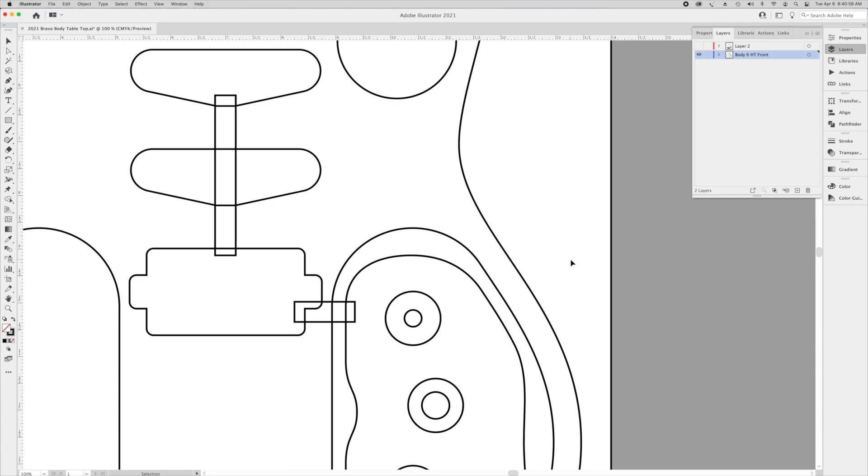But what you see here is the body for the guitar that I'm going to build. And this was done in Adobe Illustrator. Now, you can use really any sort of two-dimensional CAD program or vector-based drawing program. I use Illustrator because I happen to have a subscription to the Adobe Creative Suite, and I've been using Illustrator for so long that I can work really fast in the program. So a drawing like you see here can literally take me 10, 15 minutes to draw, and then I can move on to creating my tool paths.

But you can see here it's a single cutaway shape. This is my Bravo guitar body design. And this particular build is going to feature a humbucker single coil configuration.

And that's what these drawings here indicate. These are the pockets for the pickups, and then these are the pockets for the wire routing. And then over here, down in the lower right corner, this is the control cavity. So there will be a tone pot, a 3-way or 5-way switch, I haven't really decided yet, and another pot for volume. And then I have a shelf, this is a recessed shelf area for the cover.

Then these other shapes that you see here are cutouts for weight relief. These are going to be chambers that will be routed into the body to help relieve the weight, because this guitar, since it's going to be made out of a slab of oak, could be really, really heavy. So I want to relieve some of the weight.

Now, I know some of you will ask, well, how does that affect tone? And my answer to that would be, well, I'm sure it does. I just don't know how it's going to affect tone. There's really no way that you can measure that and determine by the shape or the size of the chambers how it's going to affect tone. But since tone is subjective, it really doesn't matter. I just want to make sure that I can remove enough wood to get the weight of the body down to something a little bit more manageable, something probably in the neighborhood of around 3 to 3.5 pounds. So that's what you see here with these shapes.

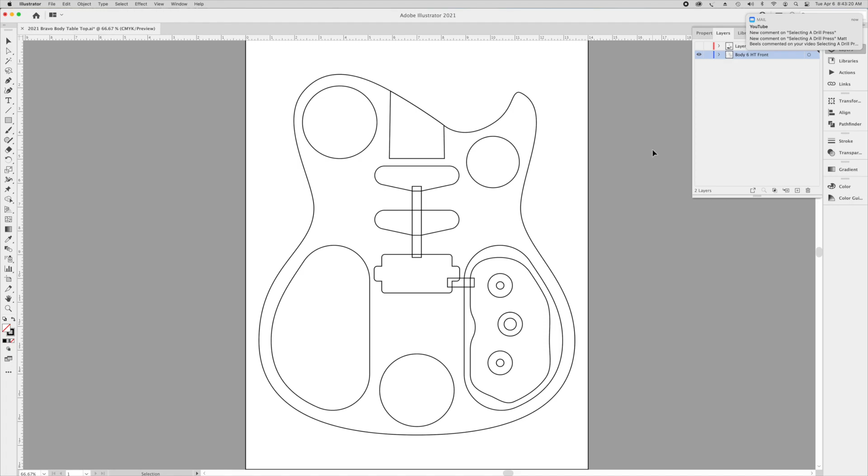Now, another thing I wanted to do when I build this guitar, I decided it'd be kind of cool to do some sort of an inlay design on the body, just to kind of make it look a little more interesting. So what I've done is I've created some artwork here, and this is on another layer. This is a dragon that I have come up with. It's basically a 4-tailed dragon.

And the way I did this was I did a Google image search for black and white vector dragons, and there were a ton of them out there. I mean, thousands of them, literally. And I searched for actually several hours before I found a couple of dragons that I thought would look really cool on this guitar. Now, of course, the problem is you never find artwork that's going to fit just right. So really what you find on the internet is more of a reference point.

So I took a couple of the dragons and created this design in vector in Illustrator, and I manipulated it so that these tails would wrap around the controls, and the flames coming out of its mouth would be right up against, or in the direction of, where the bridge is going to sit.

When I carve this on the CNC machine, this will all be cut down into the body, probably about a 16th of an inch. Then I'll fill it with a mixture of epoxy and strontium aluminate glow-in-the-dark powder. The main body of the dragon will probably be a kind of aqua blue color, and the flames would be a yellow orange or red orange color. So that's what I'm going to do with the body.

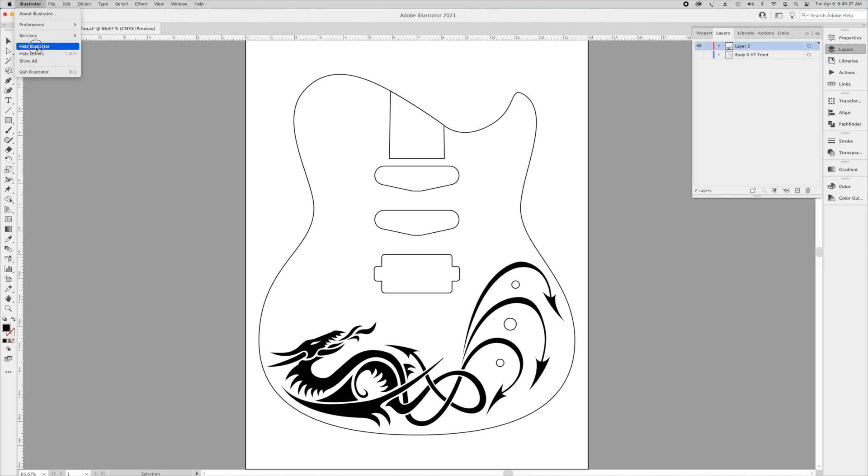What I'll do is jump over to this, which is Easel. This is an online CNC solution developed by Inventables, and I've been using it ever since I used the X-Carve. I find that this program is incredibly easy to use for generating your designs, creating the tool paths, and then actually sending the files to the CNC machine to cut the parts out. Even though I don't use my X-Carve anymore, this program still works with the Arduino Grbl controller that I have on my current CNC machine.

Now what you see here is the very first file that I have to carve on the CNC machine, and this is my 12th fret inlay on the fretboard. It also has at the top the slot for a nut. If you look at the bottom of this page, you'll see all these different pages, which are all the different carving operations that I'll do for this entire guitar: the fretboard, the neck, and the body. So this first one, as I said before, is the 12th fret inlay.

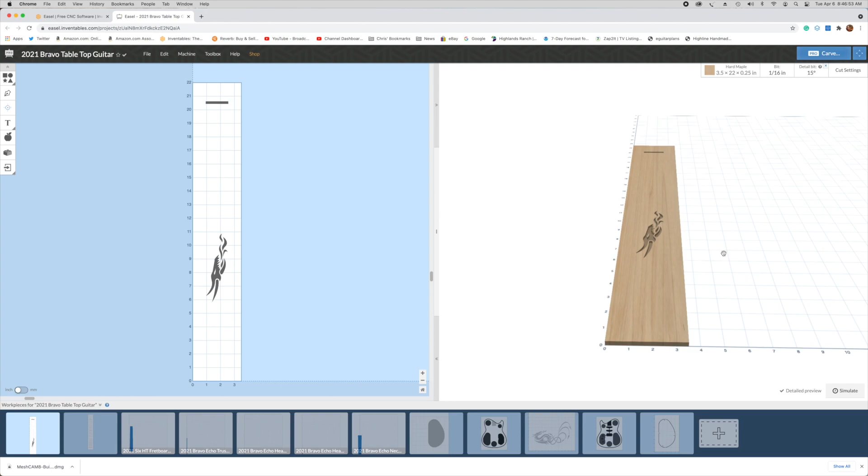You can see here on the right side of the screen a preview of what that will look like when it's carved into the fretboard. Again, I'll be filling this with the epoxy resin mixed with glow powder.

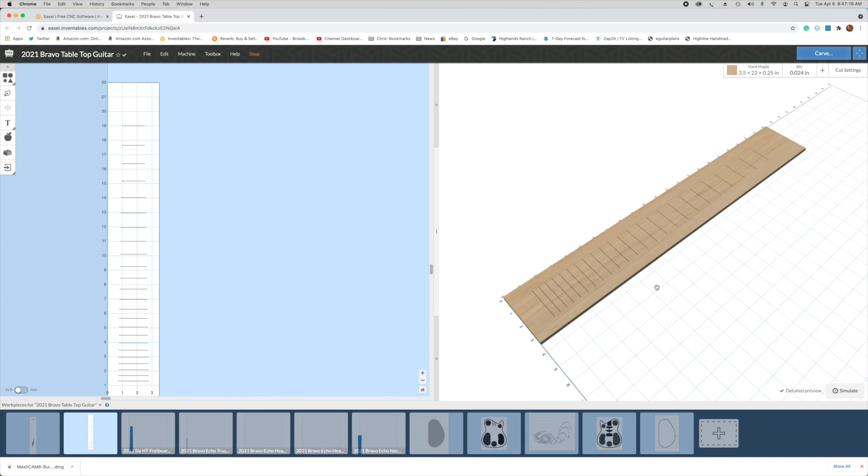Then the next file is the slots for the frets, and I cut this using a very small bit on my CNC machine. I think it's 0.024 inches in diameter, a 2-flute spiral upcut bit. To cut something like this with the CNC machine takes about 45 minutes, which isn't bad when you consider how long it takes to cut it by hand.

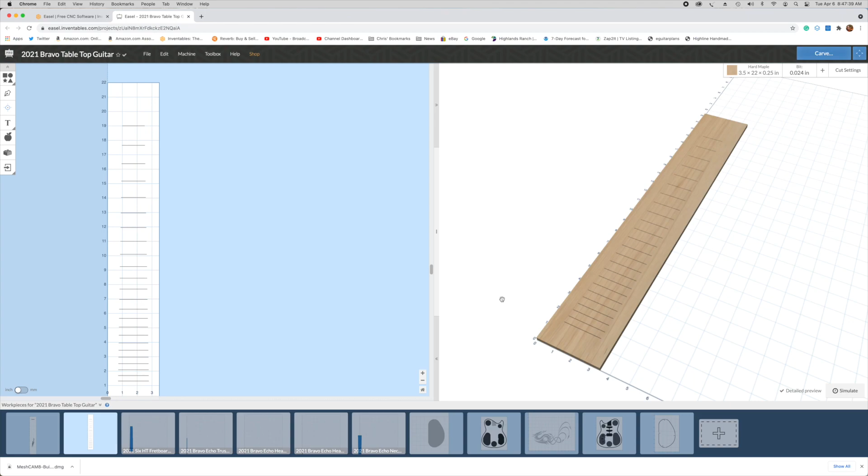Really, the only faster way to do it is to use a table saw with a blade that has a kerf equal to what you need the fret slot to be. The advantage of using a CNC machine is I can stop the slot short of the edge of the fretboard, which gives me a blind fret slot.

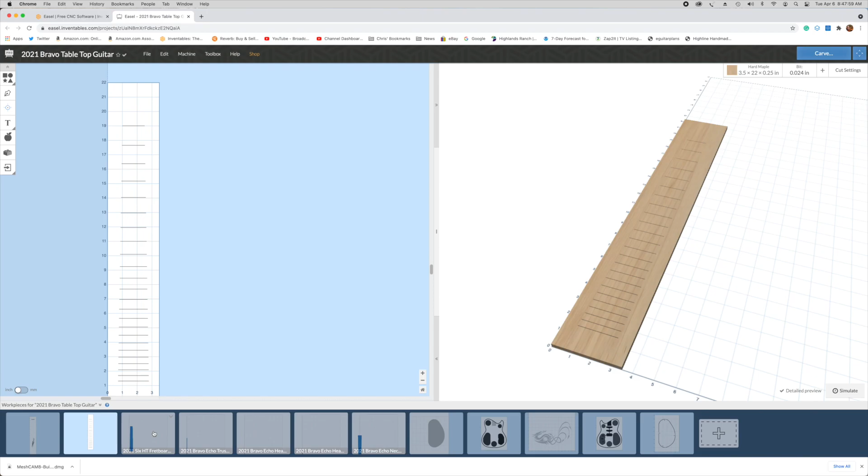Now the next file I have to cut is the perimeter shape and the radius of the fretboard. Now this was actually generated in another program. I created a 3D model in Rhinoceros 3D.

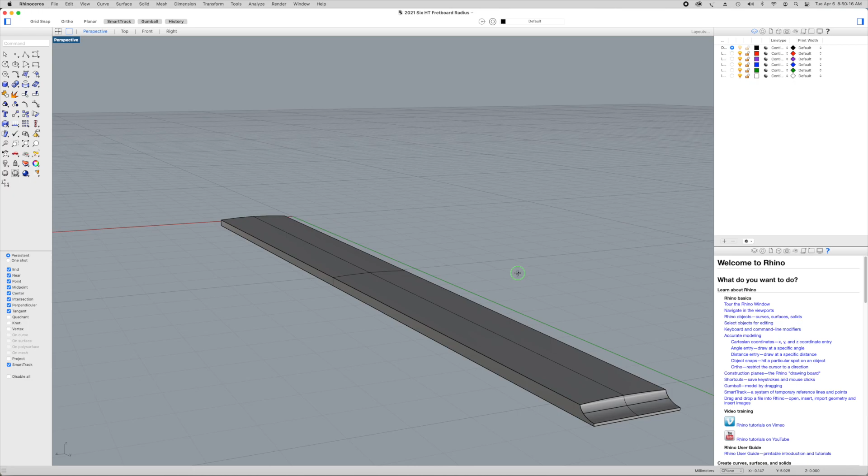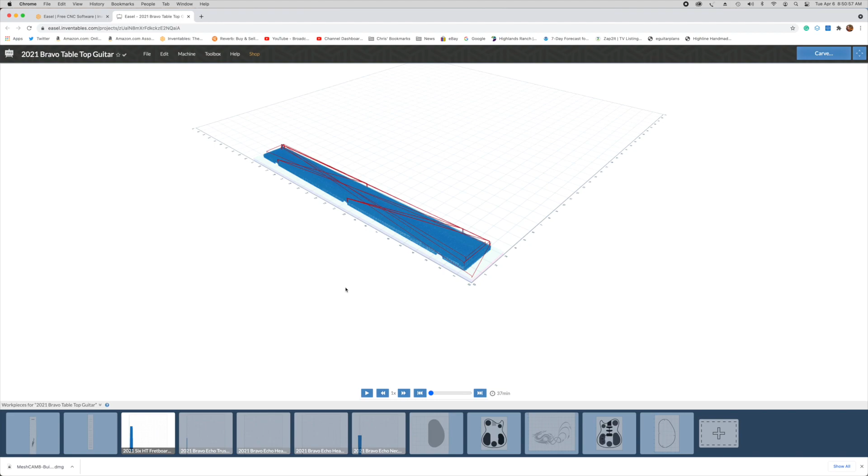Okay, so what you see here is the 3D model that I created for the fretboard. This includes the perimeter shape as well as the radius. I'll use this to create the G-code file, which I then import into Easel. So in Easel, not only can I import my Illustrator layouts to establish toolpaths, but I can take existing G-code formed or written in other programs and bring it in here, keep everything nice and organized, and Easel will serve as my G-code sender to my CNC machine.

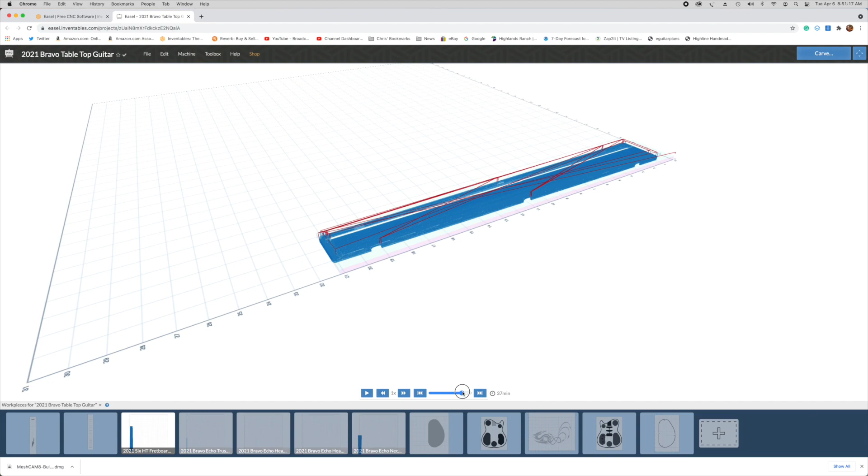So here you can see this is the radius that's going to be sent to my controller, or my CNC machine. All these blue lines are the simulation of how the tool will move across as it forms that radius, and the red lines are rapid moves when the bit has to move from one part of the blank to another.

And then the next carving operation here is for the truss rod slot that will be carved into the neck. It's basically the same thing: a G-code file that will carve out the slot that the truss rod will fit into.

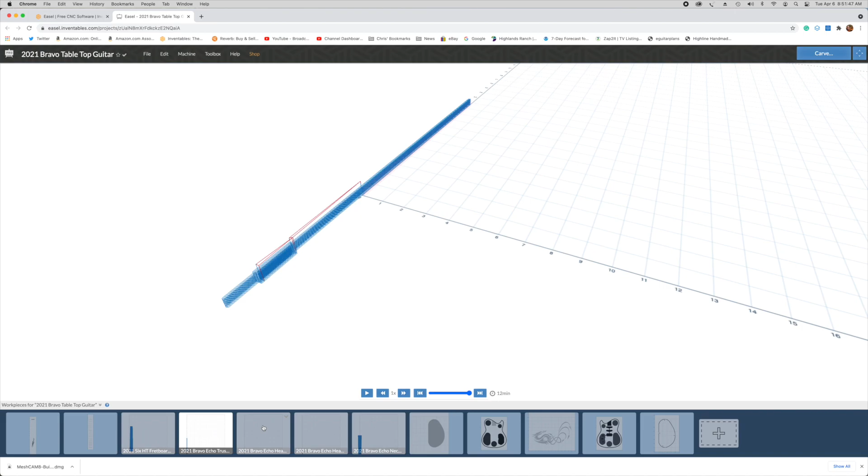Then next is the headstock, the front of the headstock, and it's an angled headstock, so it will carve all the way down into the angle.

And all of my carves are usually, well, not all of them, but carves like this one involve two operations: a rough cutting operation, which will hog out most of the wood quickly and efficiently but leave a rough surface. Then I'll come back and do the finish pass, which cleans up the surface and makes it nice and smooth.

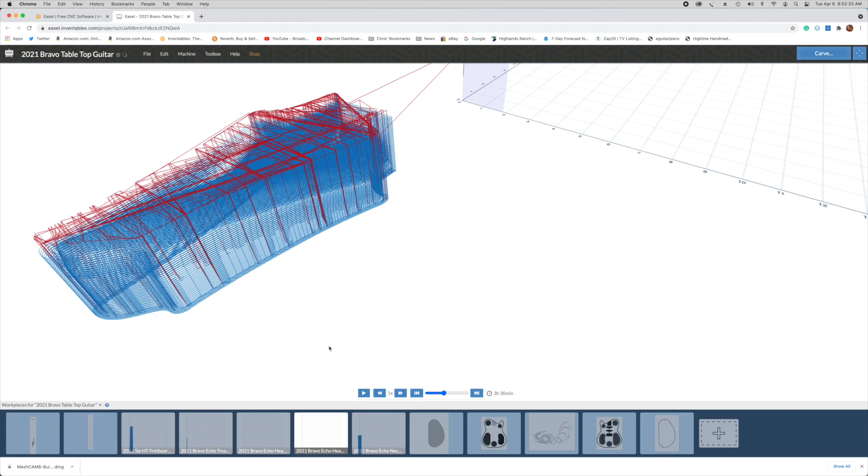So once I finish the front of the headstock, the next thing I have to do is flip the blank on my CNC machine over, and I'll carve the back side of the headstock, which you see being done here.

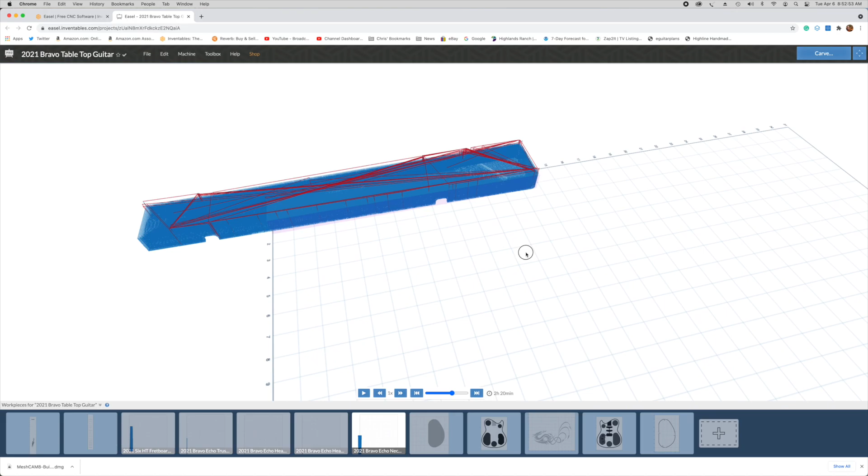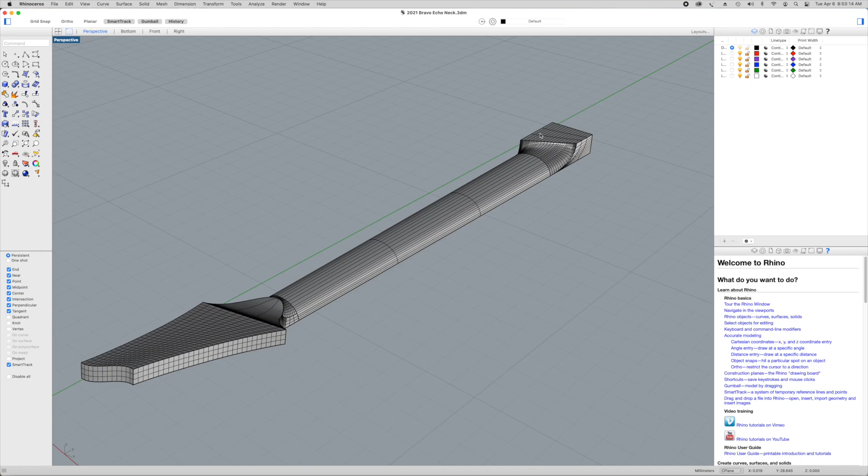Once that's complete, I can move on to carving the back contour of the neck, which is what you see here. It probably doesn't make a lot of sense, but if you look at the actual 3D model I've created, this is what that back contour will look like. The headstock is done separately, and then the back contour and the heel are carved out in this operation in Inventables or in Easel. Pretty simple process.

I use these same files, with the exception of anything with a custom inlay, multiple times. I'll carve out mini guitars using these same files. So it's sort of like you create it once and then reuse it multiple times. But once I finish with this, I'm ready to move on to the body.

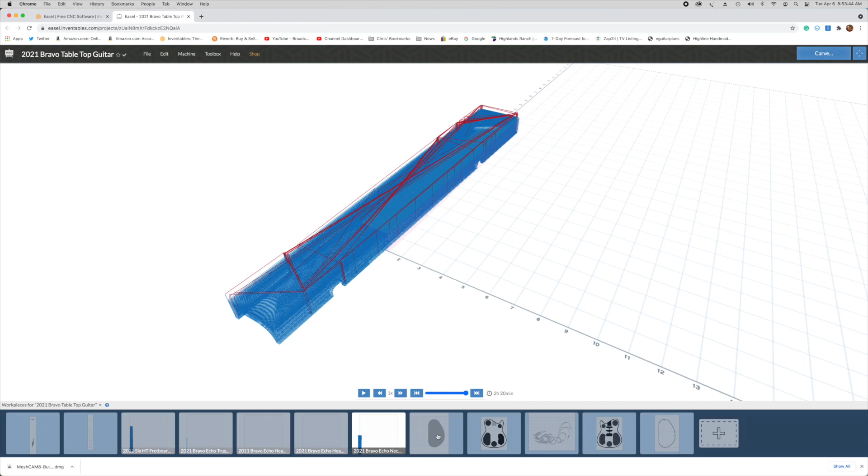The first thing I'll do is carve out the recess for my control cavity into the back of the blank. Remember, this blank is two pieces, a top piece and a bottom piece. This will be carved into the bottom. Then I'll flip the bottom piece over and cut out all the cavities, which is what you see here: the control cavity, the weight relief cavities, and a small portion of the neck cavity.

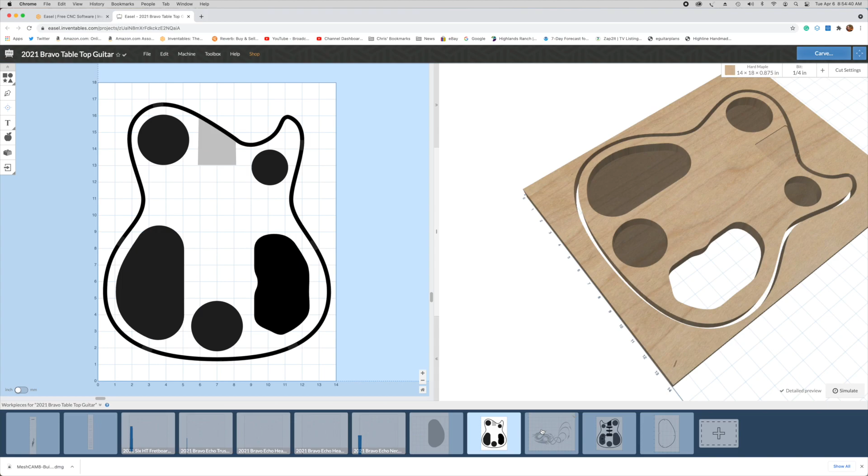When I finish with this, I can remove this part of the blank, cutting away the tabs that hold the body into the blank so that I liberate the body itself. Then I'll move on to putting the top part of the blank onto the CNC machine, and I'll carve out the design for the dragon, which is what you see here.

This will be carved using two different bits. I'll start with an 1/8 inch diameter bit to hog out most of the wood, then come back with a 15-degree V bit to carve out all the points and fine details in the design. And this is what it will look like.

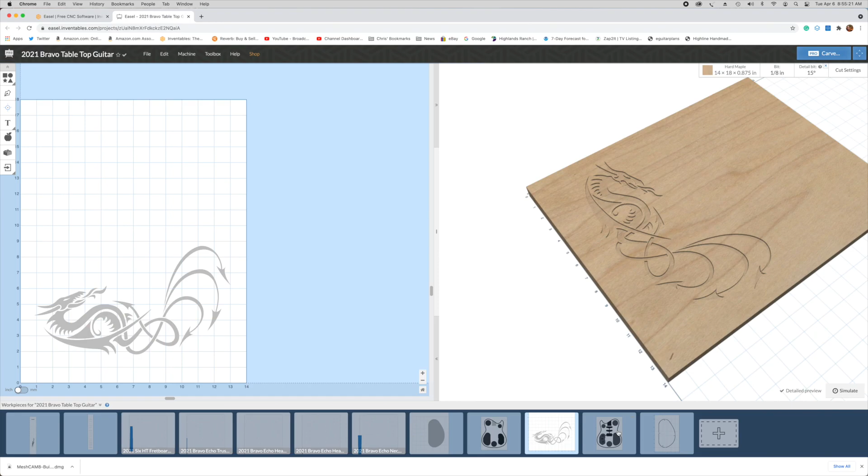After the body's all cut out, I can fill this with my epoxy glow-in-the-dark mixture. But once I've finished carving out the dragon, I'll flip the blank over again, and carve out the weight relief channels and cavities into the backside.

That'll also include my neck pocket, pickup pockets, as well as the top part of the control cavity and all the holes that will be drilled for the pots and switches. That's what this will look like over here on the right side of the screen.

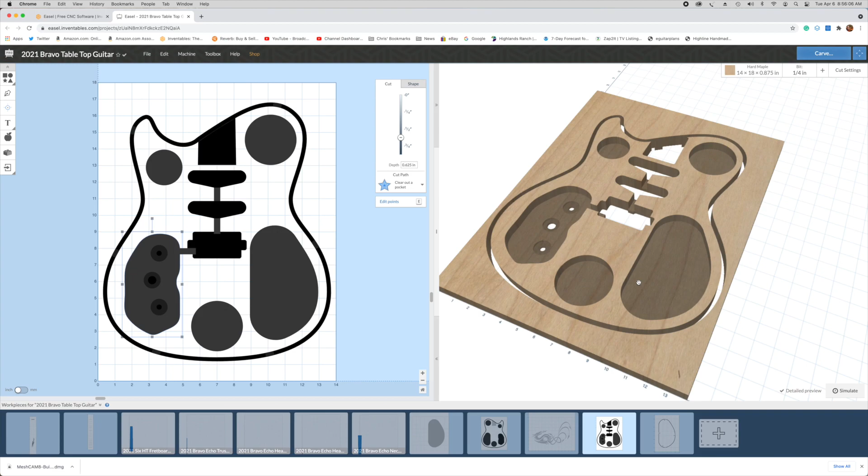Once that's done, I can liberate the top part of the body from the blank and bring the two halves together, glue them up, clamp them down, let them sit overnight, and I'll have a body ready for finish sanding. Then the very last file I have to cut, and this is one I always seem to forget, is the control cavity cover.

That's what you see here. This will just be cut out of a piece of wood a little bit more than 1/8 of an inch thick. Once I have that cut, all the cutting operations are done. All I have to do is some final sanding, glue the neck into the body, and start applying my finish.

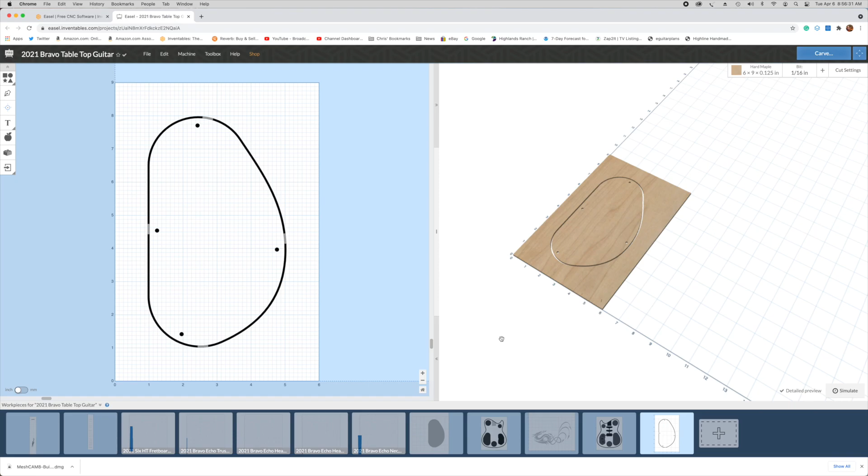Well, that's all the time I've got for this episode. Next week in part 3, I expect to start cutting these parts on the CNC machine, and that's where things start to get fun.